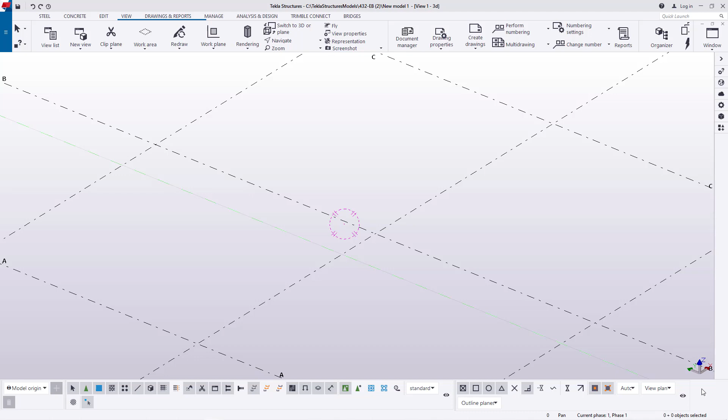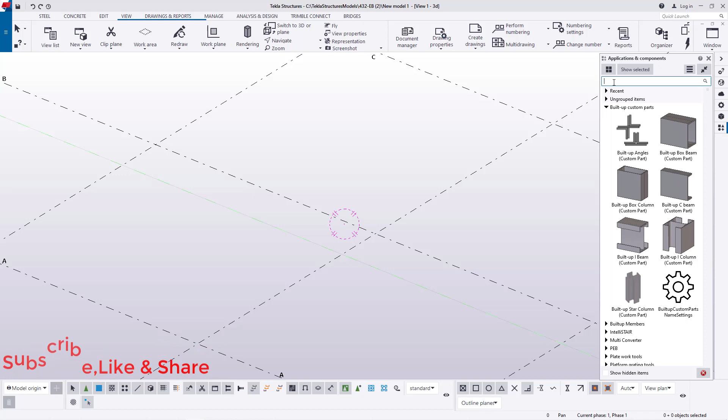And we'll get started right away, and we'll access our tools on the applications and component section, and the moment you mouse over this button here, you'll be able to read that. So I'll click on that. Once I've clicked on that, I'll just type castellated right there, then I'll double click right here. So I'll define these 2 points.

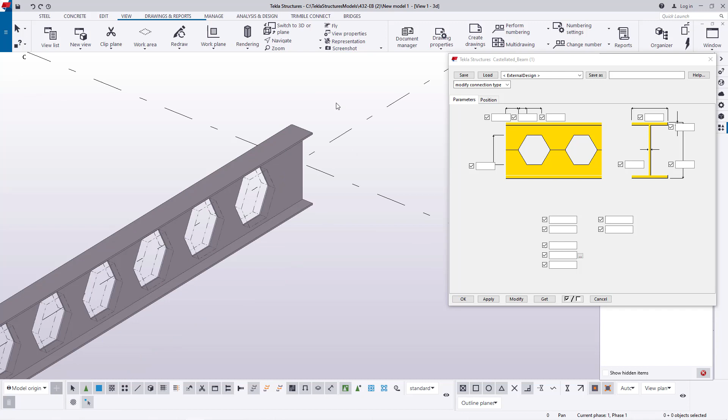I'll snap on that spot and stretch all the way to that position right here, and I'll snap right here. So the 2 points at 12, it's 12 meters, so this beam stretches from 0 to 12 meters. I'll double click and come to position right here and come to middle, because I want to move it up slightly to sit on top of the grid line. So I'll click front, then come to modify here, then click apply and accept that by clicking OK.

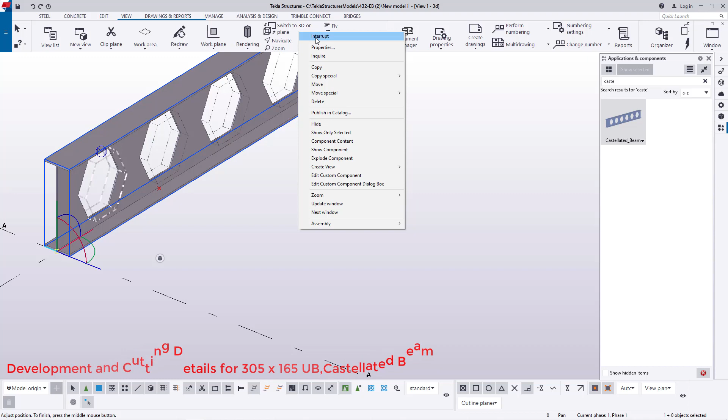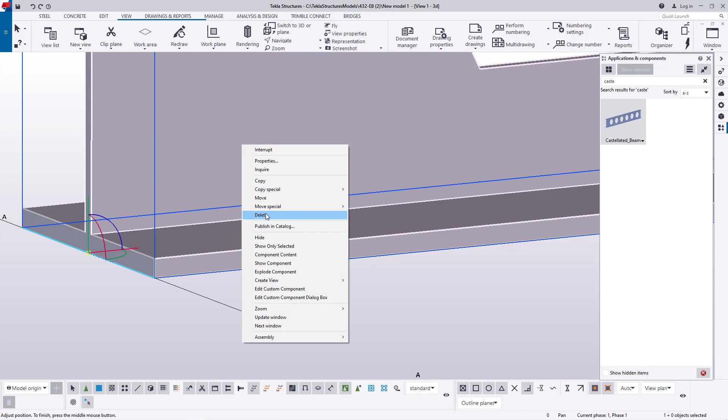Now I'll redraw, just remove those symbols of cuttings. Now let me just check the position here and turn that round, and you'll be able to see that it's not really on top, and this one is on top, so it's not straight. So I'll click that and delete that, and come once again and define that position.

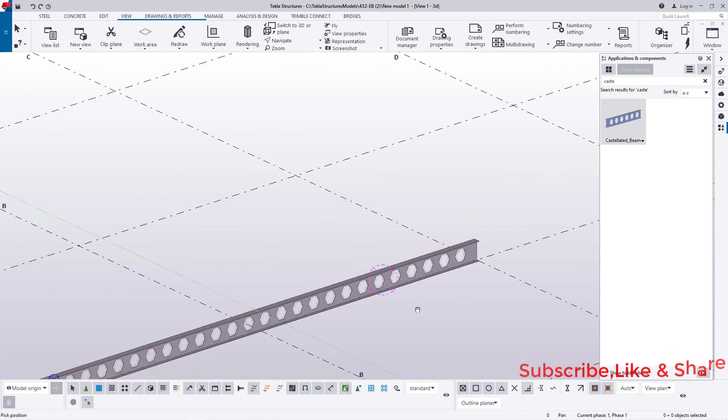I'll snap right there and move all the way to this position here, and slightly snap right there. So I think it is in the right position. So I'll turn that round and redraw that. Click on empty screen and redraw.

Now I'll double click on this, and as I explained to you, today I'm going to show you the development and cutting details for the castellated beam of this size 305 by 165 castellated beam. Now we'll feed this cutting detail from this end to this end. This will be 76. We'll feed 76 right here, and from this end to this end, this will be 88, not 76. So this one will be 76. We'll feed 76 here.

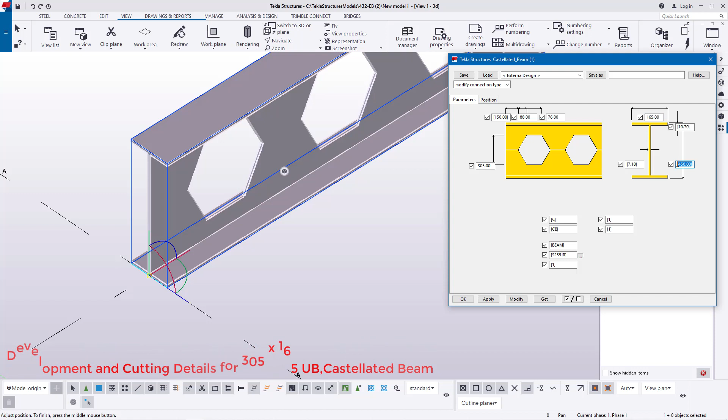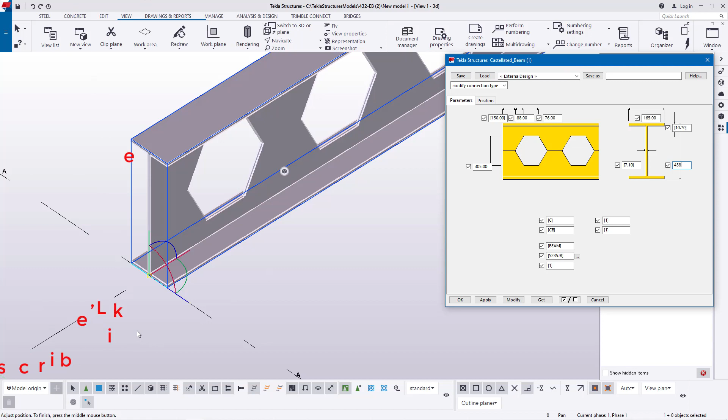And this one will be 305, and our flange width will be 165, and here the height of our beam will be 458 right here, and the thickness will just be defined with the standard thickness of this beam of 305 by 165. We'll use the same thickness. Now this is exactly what we expect to have, and this is the cutting details, and this is key. If you want to use, please just copy this and use in your cutting and development details for your castellated beams. So you can send this to workshop to be cut, and once they're joined together, they can be subjected to fabrication and connection to other members and be sent to site.

Now let's get to this. Now I'll double click on this, and you can see the moment I double click, there's lack of connection. This was not connected to this dialog box, so whatever we were feeding in was not connected. So if you realize, the moment I double click, it reverts to previous settings. Now we'll start again afresh by making sure the two are connected. Now I'll come to this connection.

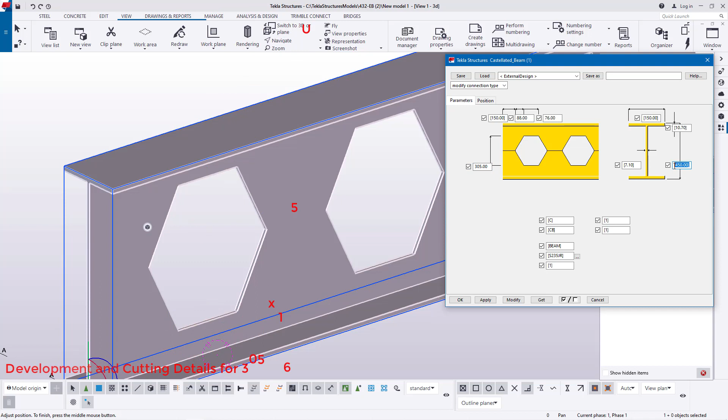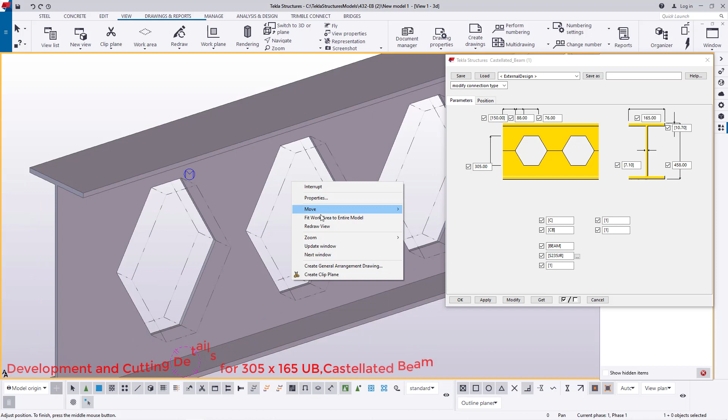This point to this point should be 88. That is 88. Now here will be 76. That's it. And this one will be 305, and this one will be 458 right there, and this one will be 165, which is the flange width. Now I'll go ahead and click modify, and the settings will be picked by this model here. And I click on empty screen, then right click and redraw, and I'll remove those symbols of cutouts.

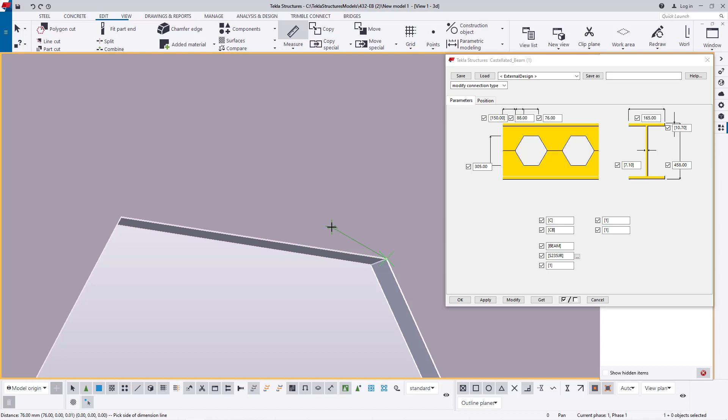And if I want to confirm these distances, if this matches from this end to this end, which is 76, I'll come to edit right here and come to measure here and check that, snap on that spot and snap on that spot, that is 76. We will not miss any step in the development and cutting details of any castellated beam member. We'll follow every step for every member.

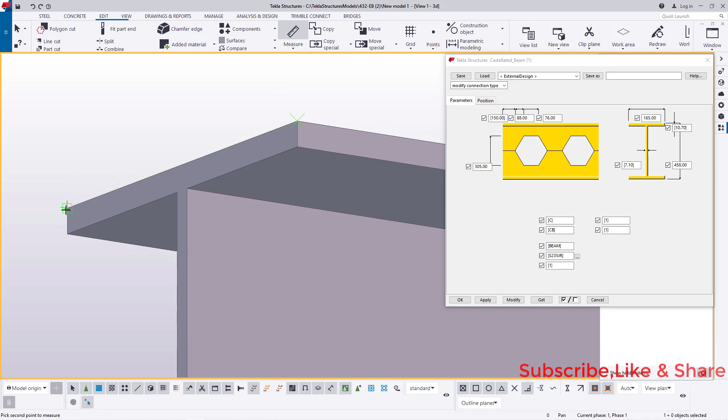Now we'll check the height of the castellated beam from this end to this end. I'll come to measure here and just check that. That is 458. And we'll check the width here, and I'll snap on that spot and snap on that spot, and that is 165, exactly what we fed here. The width and the height match what we just fed in on our dialog box to create the development and the cutting details for the castellated beam.

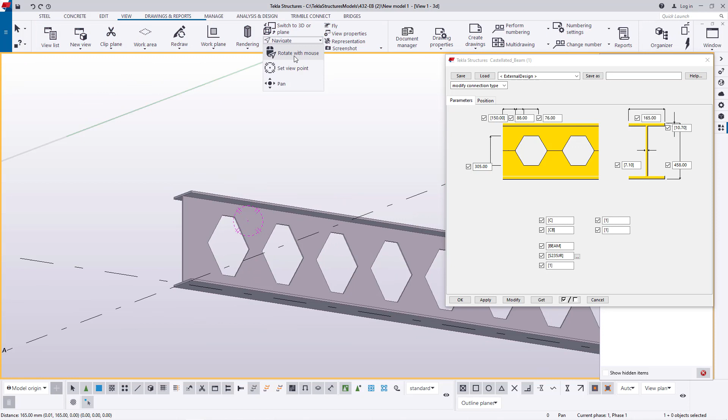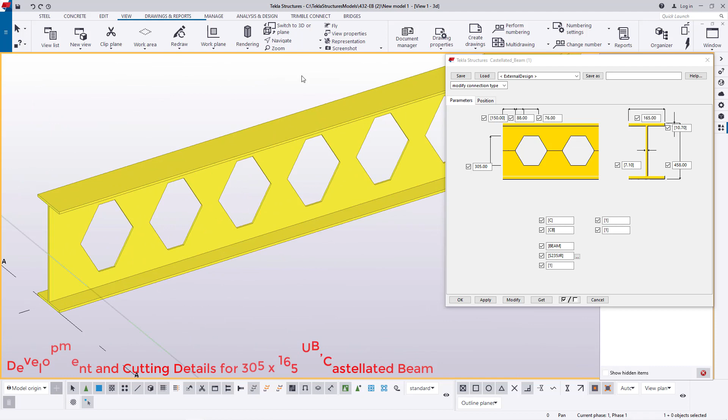Now I'll come to view and I want to turn this round here, and we can change this, just double click on the screen, then come to representation, come to color by class, and I'll come to that color, modify, apply and click OK. Then I'll zoom out and in just to reach the object I'm working on, and this is what we have at this point.

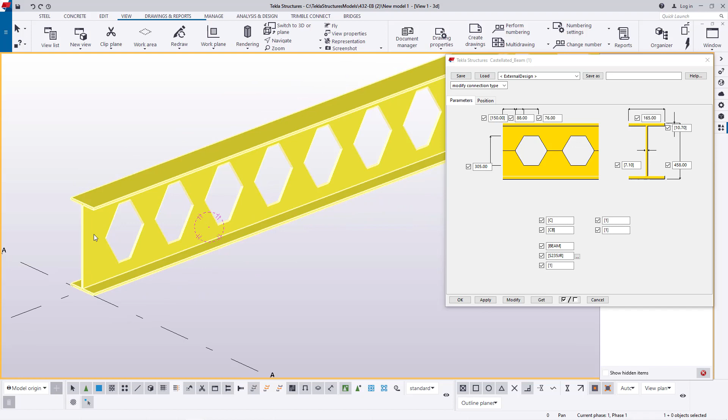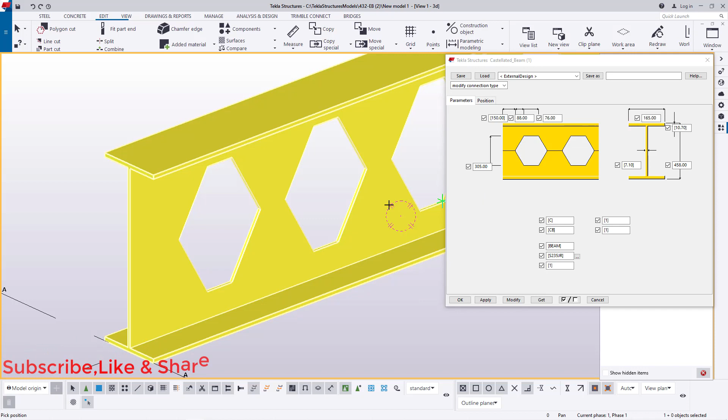Now I want to trim it along the center so that it represents exactly what will be welded or done at the workshop. So I'll cut it right at the center so that we remain with the half, and the two halves will be joined together. It will have a cutting point in between. So to place that cutting point, we have to cut it out, then join it together by weld. Now I'll come to edit here, and I'll access the points that will be guiding us through the cutting out of this point.

So I'll select this far end and pick it from the top here and stretch all the way to the other end here, and I'll snap right here, and there we are. And don't mind about that, it's easy, and you can follow every bit of our instruction.

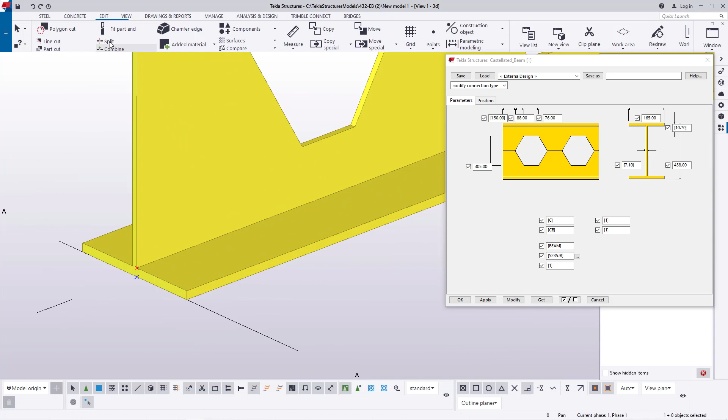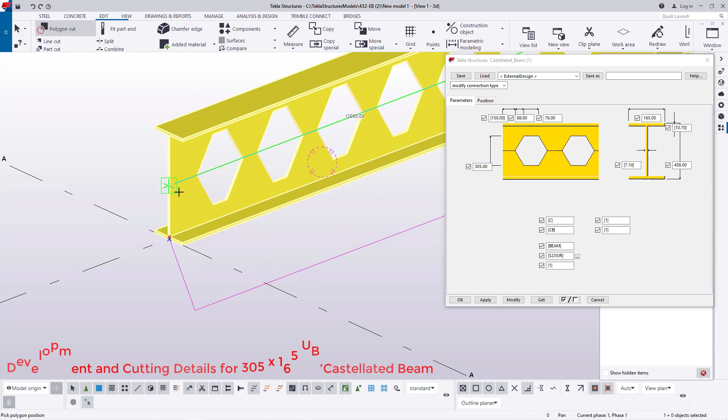Now I'll come to edit and pick on polygon, and then I'll select the part to be cut. I'll start with this one here. I'll stretch all the way to this location here. I'll snap on that spot and stretch all the way to the center of this beam, then move all the way to the other center of this beam and snap there and target my initial point created, which will close our polygon, and the part will be cut out.

So we have this in place. We don't intend to use the part that has been cut. So in this particular case, we can go ahead and save this member. We can save this, and remember, in Tekla Structures, the moment a step moved ahead and you save everything at that stage, you cannot come back and retrieve whatever you've just done. A step moved, it's moved, and you cannot come back once you've saved anything.

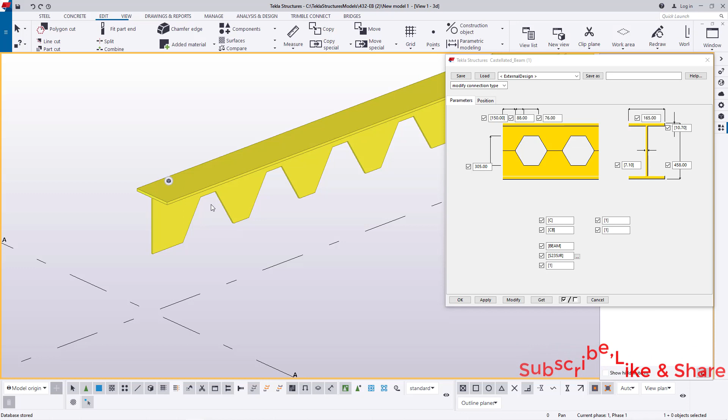So if you're not confident or you're not sure about whatever you're doing while modeling in Tekla Structures, don't try to save, because you might lose your previous step if you intend to go back and check whatever you've done way back. So when you're doing the modeling and you save it, forget about going back. Think of moving forward.

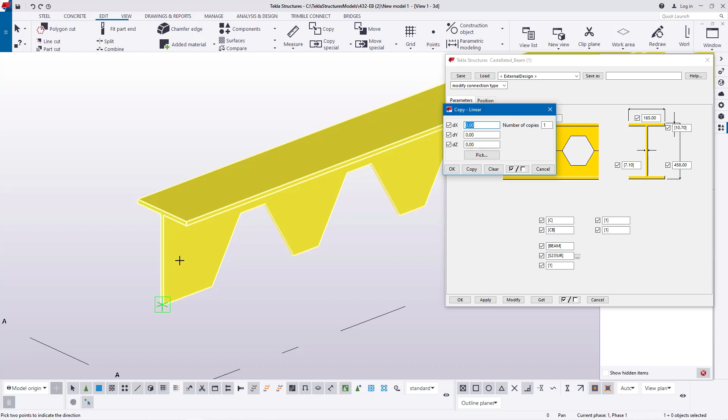Now I'll select this, right click, come to special copy and pick linear. I want to create another section that will be joined together with this. So I need another part that I'll rotate and connect with this. So I'll come to copy linear. I want a copy of this up along the z-axis.

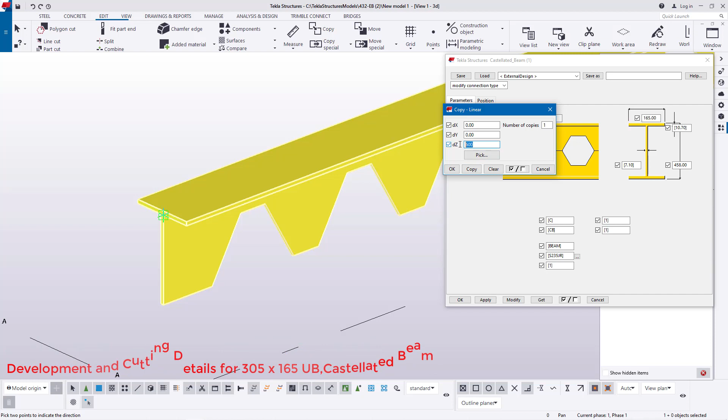I hope this is the z-axis, so I'll offset it at a distance of 600 millimeters, or I can move it up by a meter. A meter is okay. So that's it, and I'll click OK. This is what we want, and I'll redraw here, select it once again, come to view, and reorient my XYZ plane.

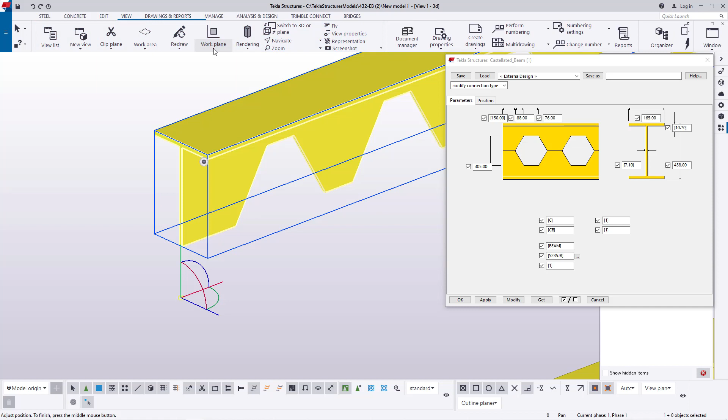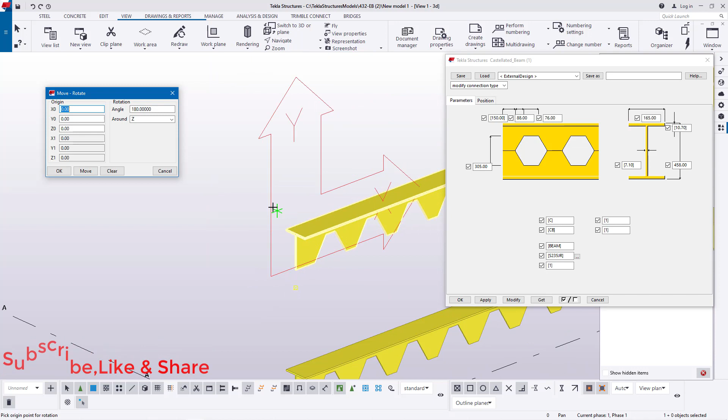Once I've done that, I'll select the work plane tool and place my work plane on that section. I'll select it once again and come to special move and come to rotate. I will not rotate this along the z-axis, which is either pointing at me or pointing at the other end. In this case, I'll be using these 2 points as my rotation point. Everything will rotate about this line here, or these 2 points. So I'll select that option here, around line.

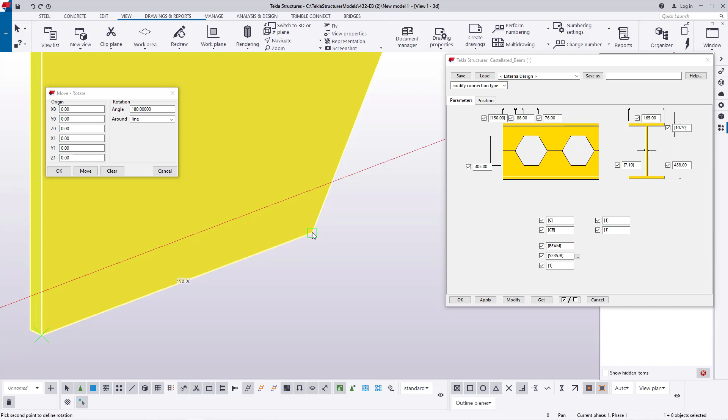I'll define my line here. I'll snap on that spot and snap on this spot here, then click move. So my object will move around the 2 points that I've defined along the x-axis. Now I'll click on empty screen, then redraw, to remove all those symbols that indicate something was done here, or signs of cutouts of a particular component.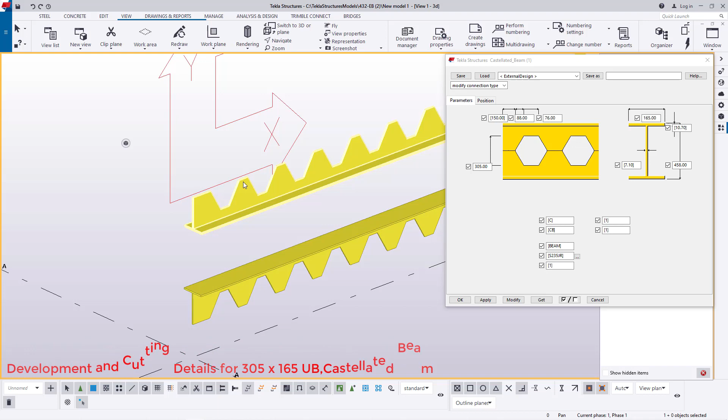Now I'll select this component, right click and come to move, and I want to join it with the bottom end, or with the other one. So I'll just select that point and join that point with this one. So you can find out that this will be the welding line for these 2 components.

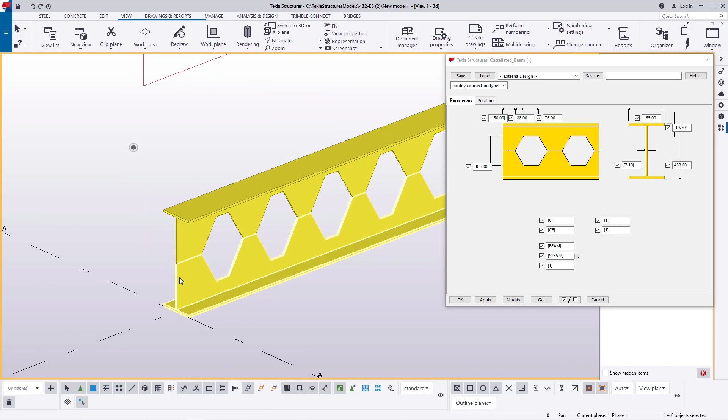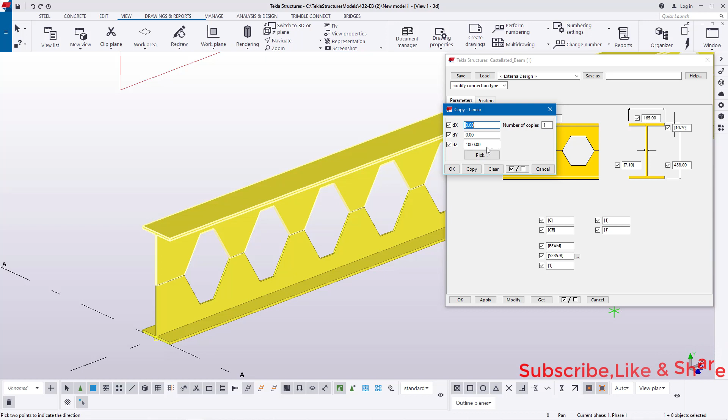And again, I can pick on that, right click and click special copy, and pick on linear, and I need to check and confirm where my XYZ axis is. My XYZ axis is pointing the other way, so we'll work with the Z axis. Under Z axis, we'll copy that at a distance of 1 meter because it's pointing at me. So I'll click okay and come to navigate.

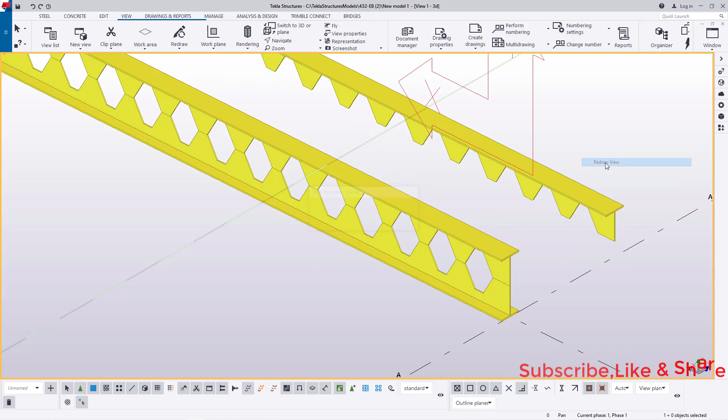If I rotate that, you'll be able to see there's another section that we use to develop these 2. So I'll right click and click redraw. We can either leave our XYZ plane at that position, or we can take it to a default position on top. I'll pick it once again because it's not detecting what I'm trying to do. I'll redraw this. I'll redraw that.

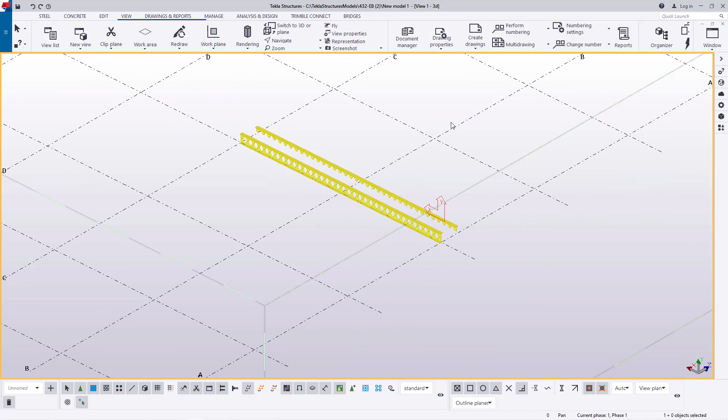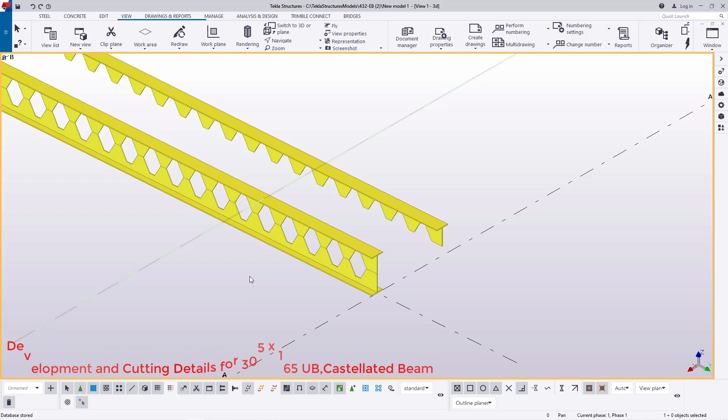And I'll come to work plane tool and place it right there in a default position, and I'll save whatever I've done because I'm okay with every stage I've passed. So I don't intend to go back and correct whatever I've done. Remember, once you've saved, you will not be able to go back. That is Tekla Structures.

Now here we are, and I'll double click on it once again and come back here, and these are the details that we will be using for that size of castellated beam, I mean the 305 by 165 castellated beam.

These are the settings. So if you intend to use these, please just follow the channel and you'll be able to get the details. Remember, this is a library, and you can retrieve whatever you want right here, and you can pick this and issue it out as the development and cutting details for this particular size of castellated beam.